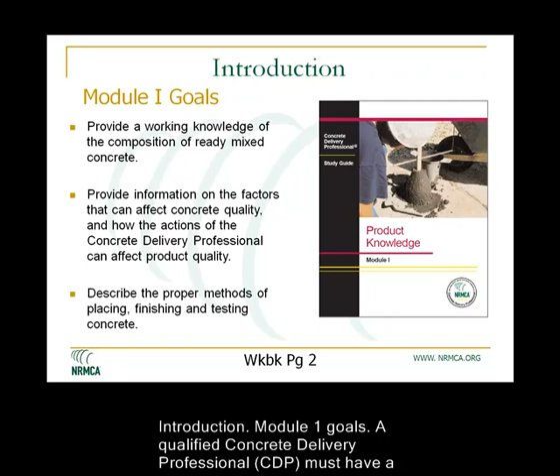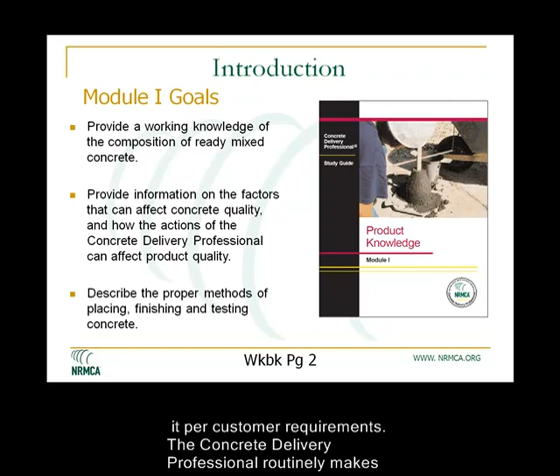Introduction. Module 1 Goals. A qualified concrete delivery professional, CDP, must have a good basic understanding of the product he mixes and delivers. The CDP is largely responsible for the condition and the quality of the concrete in the mixer drum and delivering it per customer requirements. The concrete delivery professional routinely makes judgment calls based on product quality.

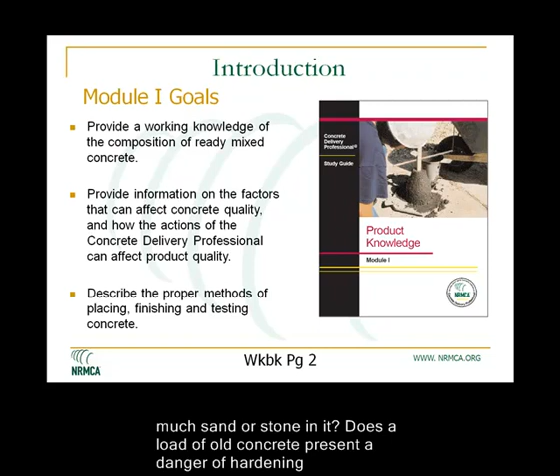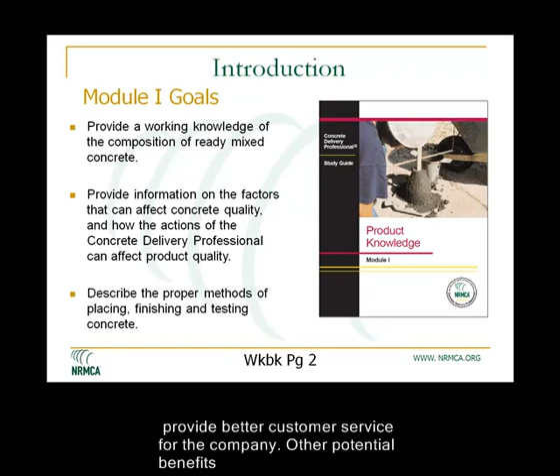Is a load too wet or dry? Is there too much sand or stone in it? Does a load of old concrete present a danger of hardening in the drum? The CDP, with thorough product knowledge, can make good judgments and provide better customer service for the company. Other potential benefits include reduced maintenance costs and improved overall efficiency.

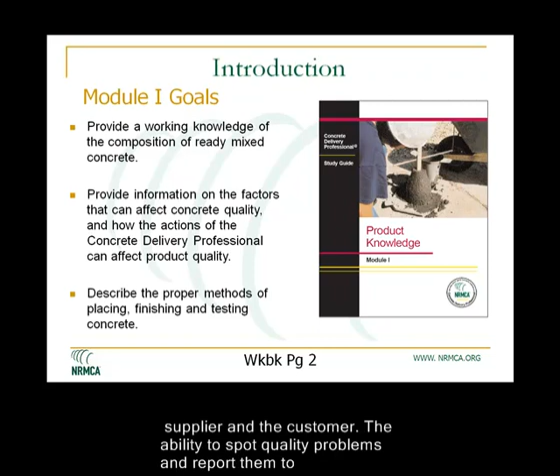The CDP also represents the concrete producer on the job site. Concrete that is not placed, finished, or tested properly can develop quality problems that can impact the concrete supplier and the customer. The ability to spot quality problems and report them to the company can often eliminate these problems.

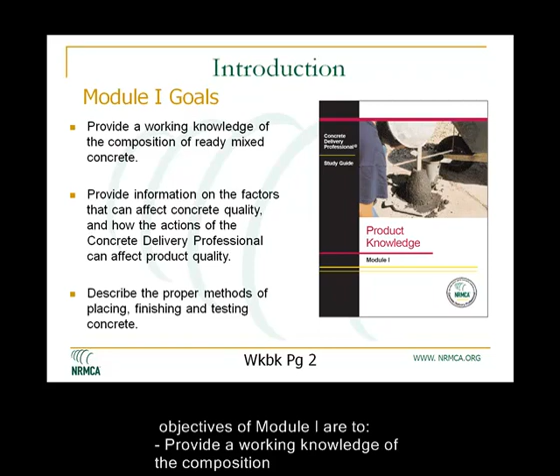Therefore, the objectives of Module 1 are to provide a working knowledge of the composition of ready-mix concrete, provide information on the factors that affect concrete quality, and how the actions of the concrete delivery professional can affect product quality, and finally, to describe the proper methods of placing, finishing, and testing concrete.

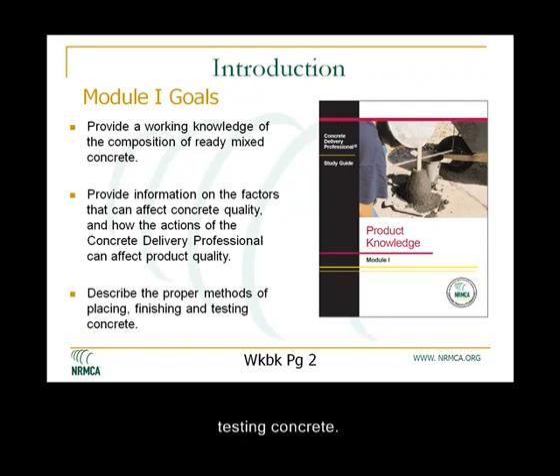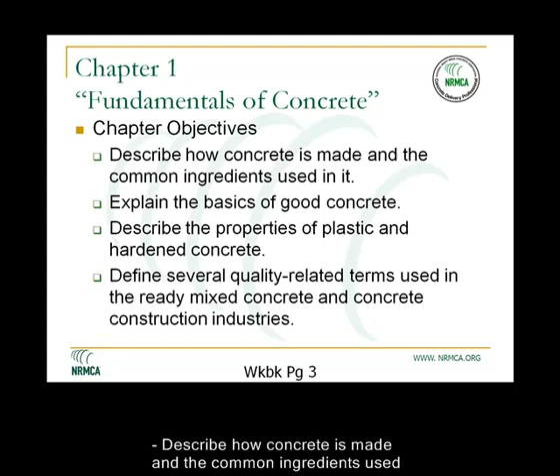Let's begin our study with Chapter 1, called The Fundamentals of Concrete. After studying this chapter, the CDP candidate should be able to describe how concrete is made and the common ingredients used in it, explain the basics of good concrete, describe the properties of plastic and hardened concrete, and define several quality-related terms used in the ready-mix concrete and concrete construction industries.

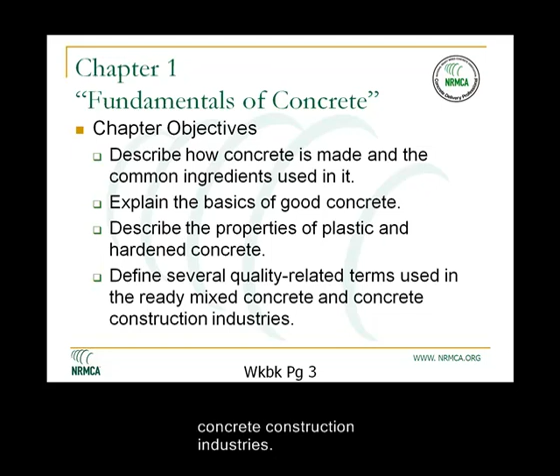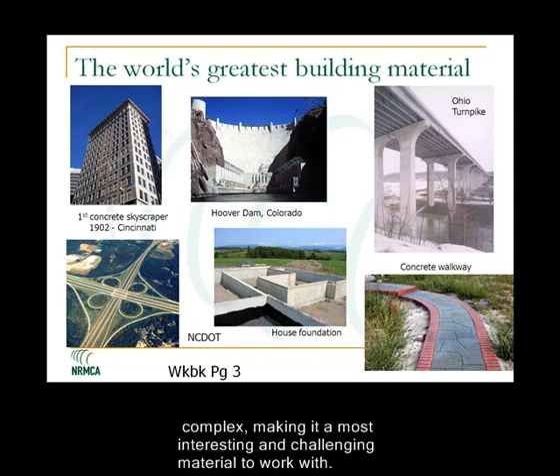The world's greatest building material. Concrete is strong, versatile, durable, and economical. It is one of the world's most popular building materials. It is made from a variety of readily available raw materials. It can be used to build skyscrapers, dams, highways, bridges, house foundations, and sidewalks. Concrete is simple and complex, making it a most interesting and challenging material to work with.

What is concrete made from? Concrete is a mixture of cement, water, and aggregate. Aggregate is usually a combination of sand and stone or gravel. Concrete mixtures may contain other ingredients, but these are the 3 basic ingredients common to all concrete mixtures.

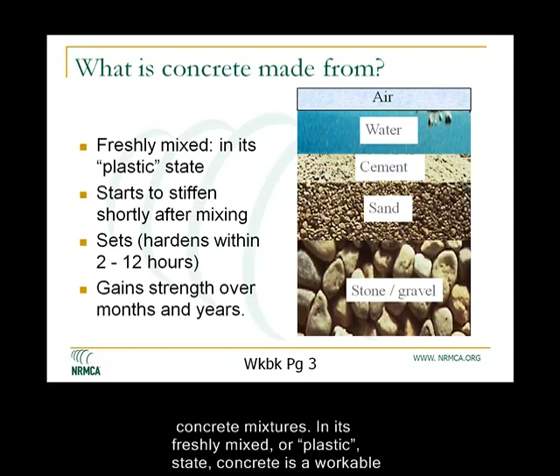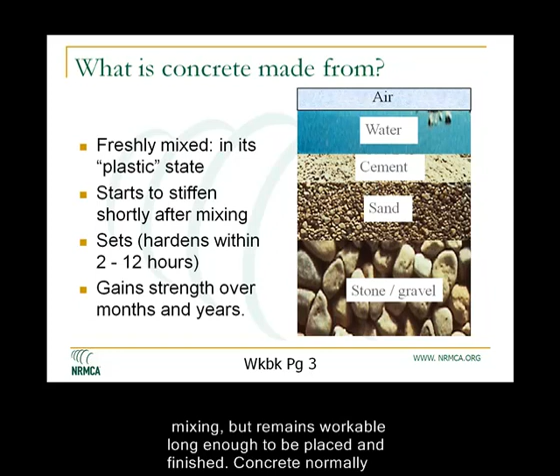In its freshly mixed or plastic state, concrete is a workable mixture that can be cast into any desired shape. It starts to stiffen shortly after mixing, but remains workable long enough to be placed and finished. Concrete normally sets or hardens within 2 to 12 hours after mixing and continues to gain strength for months or even years.

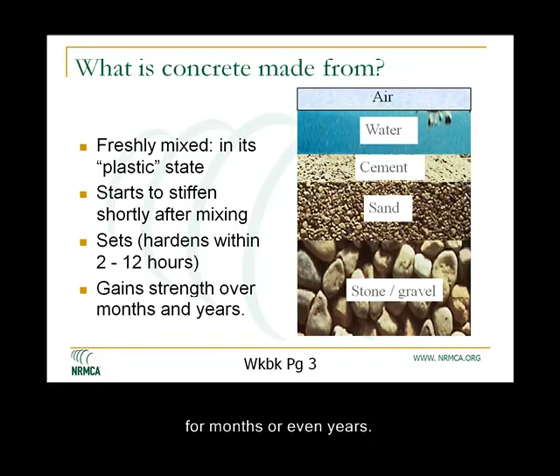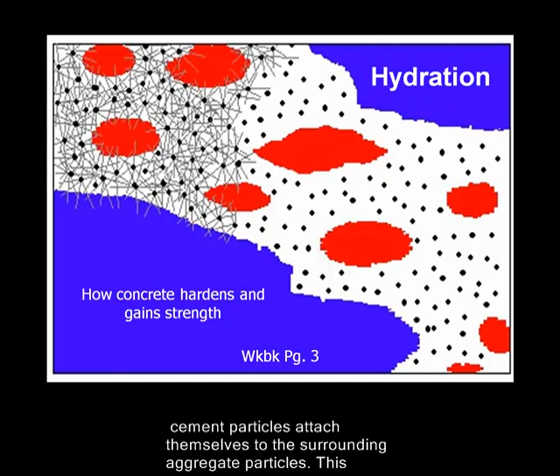Hydration: how concrete hardens and gains strength. Plastic concrete hardens as the result of hydration, which is a chemical reaction between cement and water. Hydrating cement particles attach themselves to the surrounding aggregate particles.

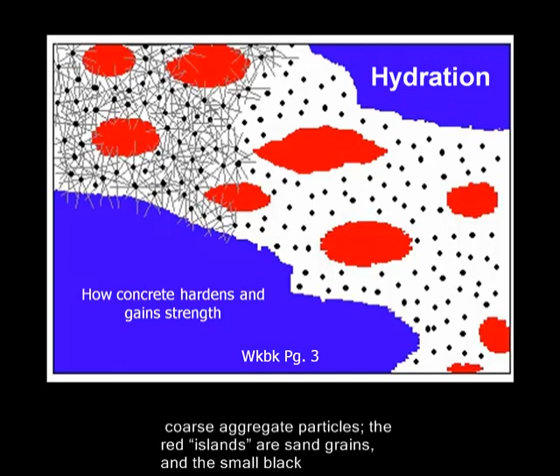This diagram of hydration looks something like a river. The blue shoreline represents coarse aggregate particles. The red islands are sand grains, and the small black dots on the river are particles of Portland cement in freshly mixed concrete. When cement mixes with water, hydration starts.

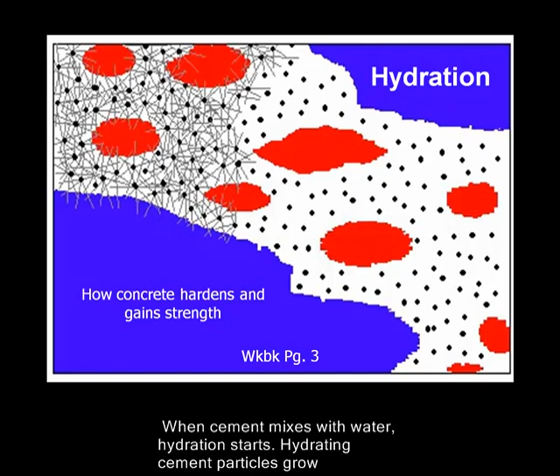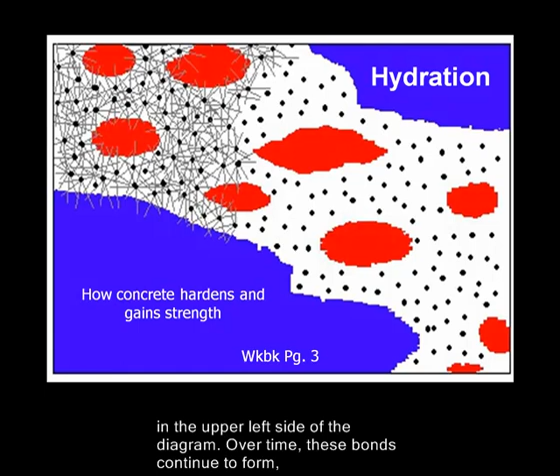Hydrating cement particles grow fingers that mesh together and bind the aggregates into a hardened mass, as illustrated in the upper left side of the diagram. Over time, these bonds continue to form, filling the voids between the particles.

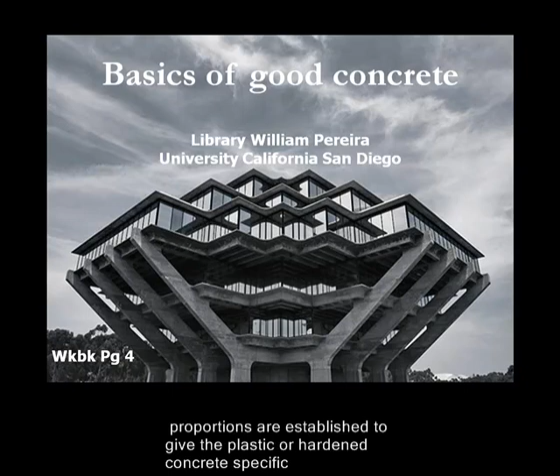Basics of good concrete. Concrete mixtures can be customized for many different types of construction. Mixture ingredients and their proportions are established to give the plastic or hardened concrete specific properties. There is no need for truck mixer drivers to be the product quality and design experts, but drivers do need to be familiar with how good concrete is made.

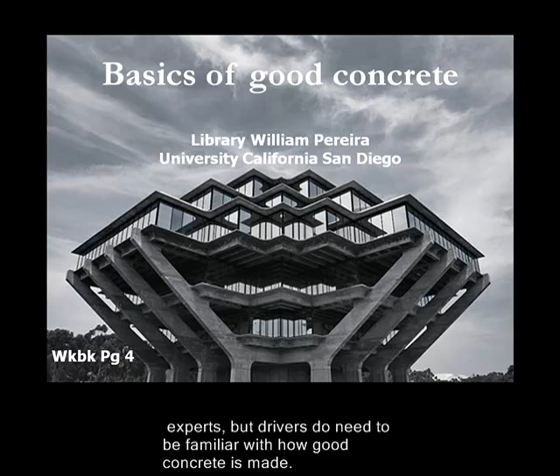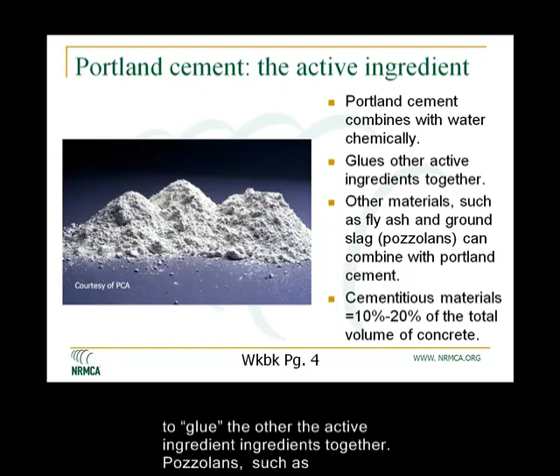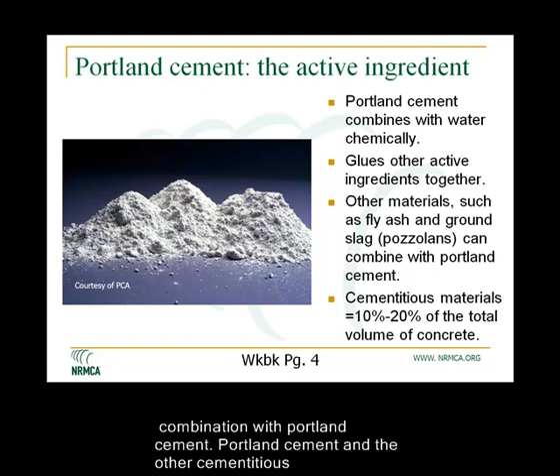Portland cement, the active ingredient. Portland cement and water combine chemically to glue the other active ingredients together. Pozzolans, such as fly ash and ground slag, may also be used as cementitious material, but always in combination with Portland cement. Portland cement and other cementitious materials usually make up about 10 to 20% of the total volume of a concrete mix.

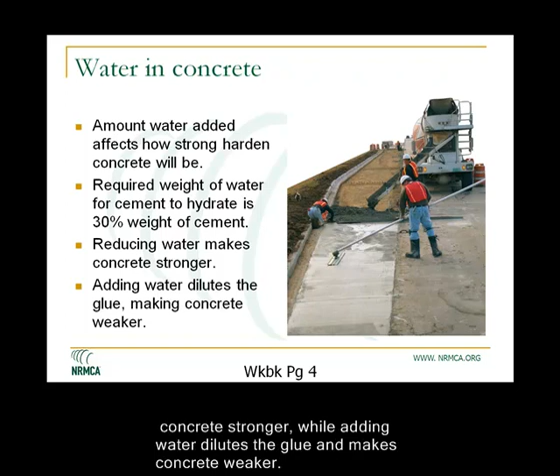Water in concrete. The amount of water added to concrete affects how strong the hardened concrete will be. Most concrete mixtures are designed with a certain cement content and enough water to make the mass workable. The required weight of water for cement to completely react or hydrate is about 30% of the weight of the cement. The extra water, sometimes called water of convenience, is added to make the product workable and easier to place. Reducing the mixing water content makes the concrete stronger, while adding water dilutes the glue and makes concrete weaker.